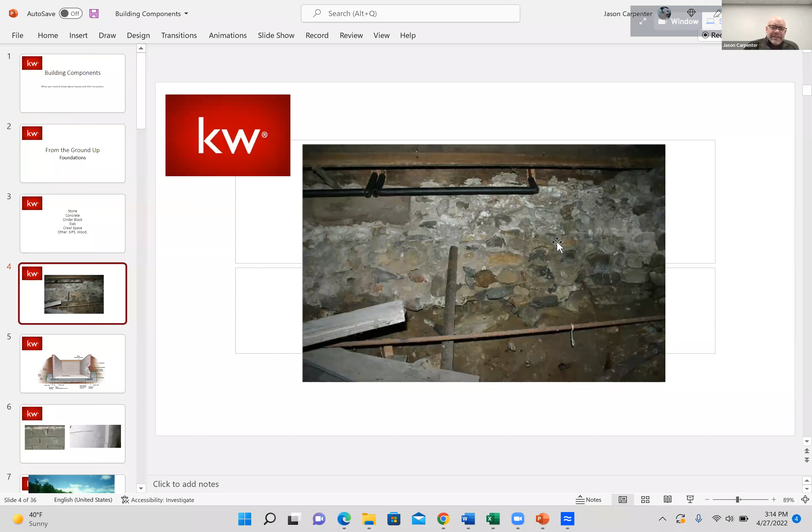This over time is okay, but not great from a structural standpoint. It can settle. One of the things you'll look for on a lot of these stone foundations is that mortar in there through the years has gathered enough moisture, released enough moisture, and it's just sandy to the touch, and that sand will just fall right off. That can result in the stones coming loose. So look for piles of sand on the concrete floor, missing mortar, things like that. It can be skim coated, can be fixed, but something to look out for.

Now, concrete block, used a lot on the lakeshore. I don't know if that's because of the sandy soil composition over there, or just the makeup of the builders. You'll see it in Grand Rapids as well, and throughout West Michigan. The things you want to look out for with a concrete block foundation is what we call buckling, or a backfill problem when they push dirt back in around the foundation. Poured concrete can have this too, but along this lateral line you'll see kind of a buckle.

This pushes in if it's improperly filled, and you'll see a gap here. You'll also get what's called step cracking, where you get a little bit of settling, and you'll see like a jagged line right along the mortar, just a crack down along the steps of the mortar joints. That could have happened 10 minutes after they backfilled, or 10 years, or 100 years. It's not for us to say. Everything can be fixed—just matters how many dollars and zeros are on the check, as I always say.

But if that wall isn't straight vertically, or you start seeing that step cracking, and if those concrete walls are painted, look for extra caulk that's been painted over in those mortar joints. You can kind of see it gobbed on there, or if it's unpainted, a different color of mortar. You'll see some repairs there, and just make sure you're not seeing any staining.

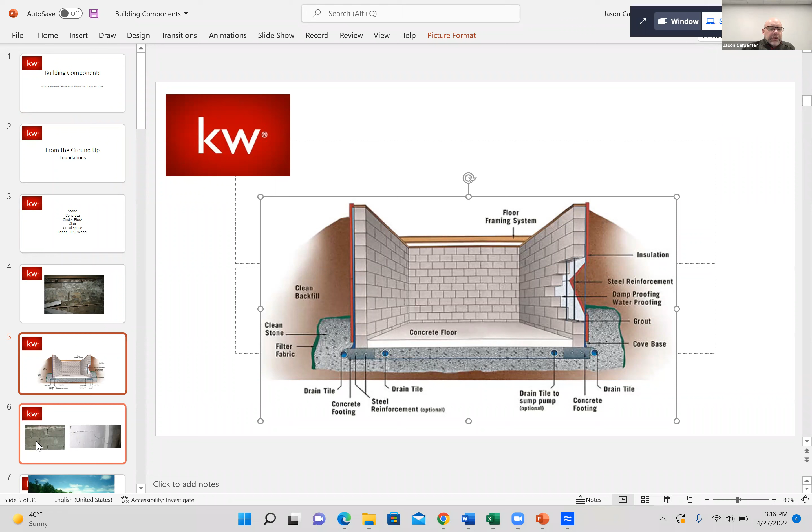Now, here is a modern foundation. This has your poured walls. You can see there's a membrane, or this is probably a spray-on tar material that waterproofs it from the outside. Most new construction nowadays has perimeter drains at least on one side, either on the interior or exterior of the home, to allow water to flow away. So obviously, as time goes on, we've learned things.

The thing you want to look for in poured concrete is jagged cracks. You can see along this, you'd see a crack starting up here and going down to this corner, and one of equal size and depth coming from this corner down to this window. That could indicate maybe that corner has settled a little bit.

Again, it's not our job to play structural engineer. It's our job to visually see things, point things out, and make sure the buyer is aware of what we're seeing. If you know specifically, like it's your listing, that water comes pouring in as soon as you get a half inch of rain, that should be disclosed whether the seller did or not. If it's something you've observed—maybe you were there last week during a rainstorm showing the house and saw water pouring in, and now you're showing it to a different buyer this week—it probably should be disclosed. Hey, I was in here last week, saw water pouring in. That's your job.

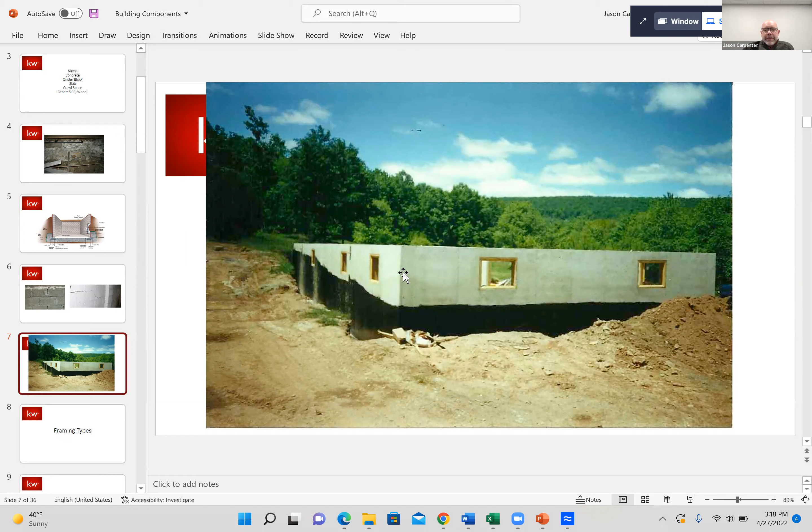So on top of framing types, wood is now at a premium, and there are energy codes that need to be met. You have different types of framing, and now modular and manufactured homes versus stick built, 2x4 versus 2x6 framing. There's always going to be some changes there. You do have engineered wood framing now too. We were at a commercial conference last week, and they talked about mass timber, where they're making building panels out of laminated timber that has the strength of concrete and steel. You'll see that in some commercial buildings.

With a modular home, and again, the MLS, fellow agents out there, you have to understand the difference between modular, manufactured, and site-built homes. And then there's also a kind of hybrid version called panelized construction.

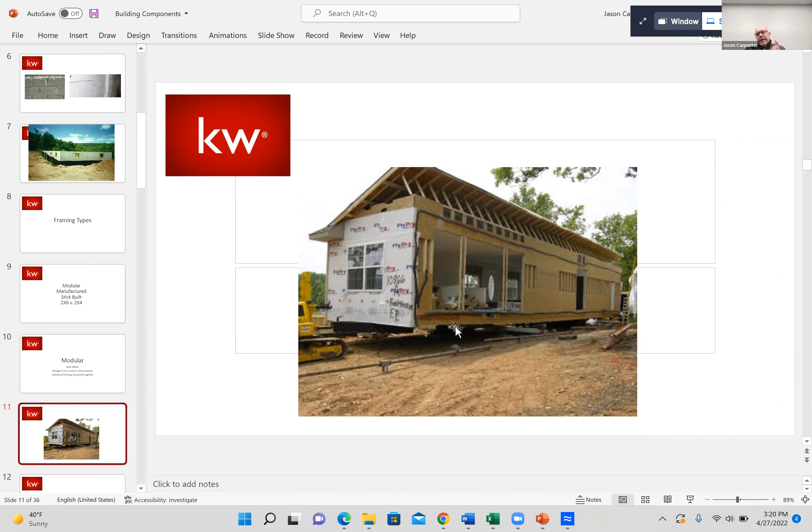A modular home is built off-site. It's brought in on a truck in several pieces. It has some traditional framing methods, but it's then joined together. You might see three or four pieces of half the home brought together and then joined. So when you go in the basement of one of these homes, you're going to see a joining plate. You'll see two beams down the center of the house and a joining plate there, versus one main beam running down the center. That's a good indication it's modular.

A mobile home is brought in one piece of framework, maybe two, since sometimes double wides would qualify, but typically it comes in with a metal framework underneath it like a car does. It's titled like a car, there's a plate on it, and it has a VIN number like a car. And I have this term on here: highly unfinanceable. So it's a little tricky, but it can be done.

The one thing most lenders require is that it's the only site the mobile has been on, simply because you get shifting and heaving if you take it off one site and move it to another. I think that's why they do that. So there's a thing called an affidavit of affixture that should be available during the financing process to prove it's there as the only site it's been on. If you don't have that, you have to hire a structural engineer to go out and verify it's in good enough shape to be financed.

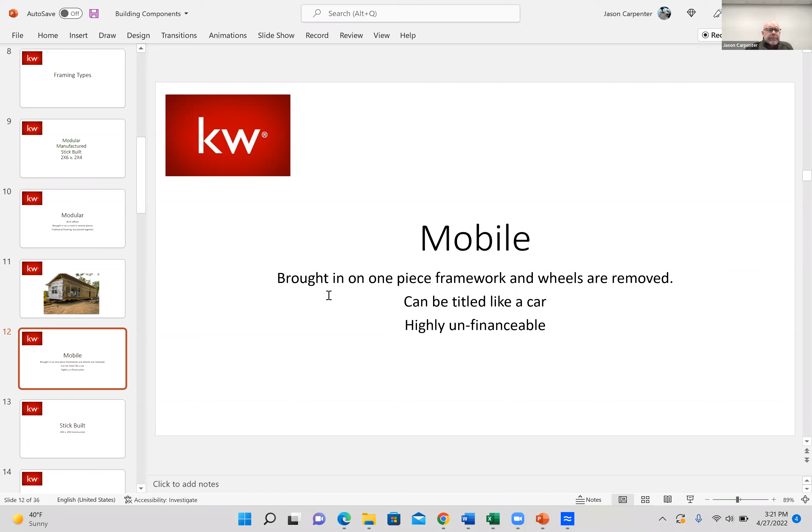More on mobiles, and real quick, you realize too that you can't list and sell a mobile home in a mobile home park, because that's not attached to the land. The landowner owns the land underneath it, and the mobile homeowner pays rent to that, almost like a lot fee. So that's a separate license. There are a couple people in town that do that.

So with stick built, we have 2x4 versus 2x6 construction. One thing to look for, and I usually have a tape measure in my car, I don't carry it into the house with me, but if you look at the depth of the window framing, walking through the living room or dining room of a house, I can usually tell. The depth of a 2x4 is 3.5 inches, and then you've got sheathing and siding on one side and drywall on the other. That adds up to about 6 inches.

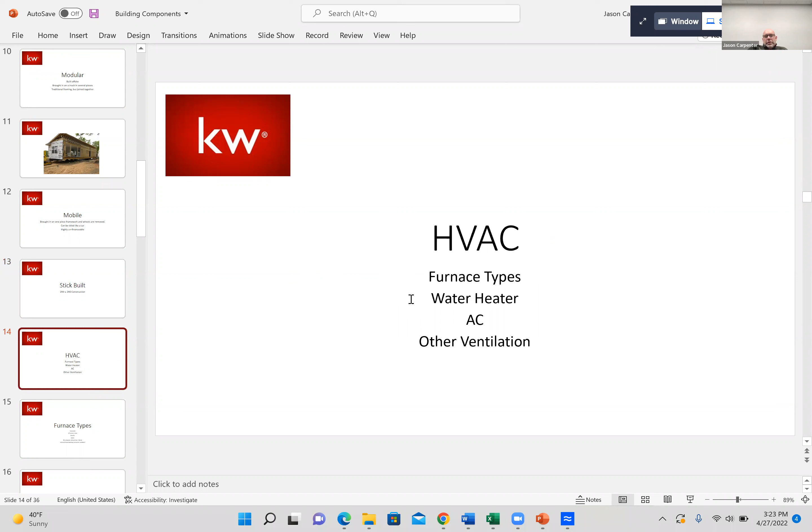So with HVAC systems, you have different furnace types, water heaters, AC, and other ventilation systems that make up your HVAC system. Obviously, the age of the furnace is a big thing, along with the different types of furnaces. We should all know what a gas forced air furnace is, that's typically about a 3.5 to 4 foot tall metal box in the basement. It has a different energy efficiency level, but would have the AC unit in with it, with a coil going in. There are little things you can look for there.

Versus a gravity feed furnace, which comes in an older house, or a boiler, things to look for as far as oil fired versus propane, versus natural gas and or wood.

So with a forced air furnace, you have two different efficiency levels. The high efficiency type has white PVC pipes coming out, usually about 2 or 3 inches, venting outside. Versus the traditional 80% efficiency furnace, which has a metal stove pipe coming out that's tied into the chimney somewhere. That's something you can point out to your buyers.

You'll learn over time the age of furnaces by their color. There's no chart that says tan is 20 to 30 years old, or light gray versus dark gray, or aqua - there's no color coding - but you'll soon be able to tell that size and shade of color of these furnaces are fairly similar based on the year they're produced. So if I'm seeing a tan furnace in the basement, I'm probably going to guess it's at least 20 years old, because most everything's been light gray or dark gray in the past few years.

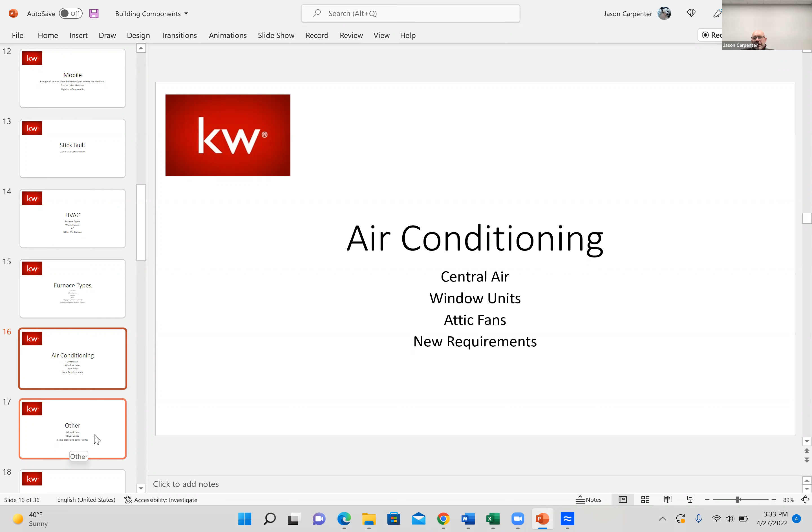So just because they say it's working doesn't mean it won't come with cost down the road for your clients. You can do research—just Google new air conditioning requirements and see the availability of whatever materials they're using. There's technical jargon for that which I don't have memorized right now. Again, we're not trying to make anybody a licensed builder today. Other parts of the HVAC would be exhaust fans—bath fans, hood vents over stoves, and dryer vents.

With high efficiency, you're going to have power venting on water heaters with a PVC pipe versus a stove pipe, same as your furnace appliance.

Not too expensive. The thing about exhaust fans in older homes is they didn't actually vent them outside—a lot of times they just went into the attic. So if you think about dumping all that hot, damp air from the shower into your attic, where it's cellulose insulation, wood decking, hot environment in summer, it's just a mold growth, like a giant petri dish up there. A lot of times you get these inspection reports, and that's what leads to mold in the attic—that venting.

It's really simple to fix. You just pop a hole in the roof, put in a little stove vent, and tie that vent line to it so it pumps that warm, moist air out of the attic. Can be done through the gable end if it's close enough—sometimes you'll get gable venting, just tuck it up there, just something to get that air out of there.

Dryer vents—again, I'm not going to kill a deal on this, especially in this type of market, but inspectors are going to tell you that it should be either a rigid stove pipe coming out of the dryer or a metal flex vent. You see a lot of this white PVC dryer vent hose, and you're really not supposed to use that.

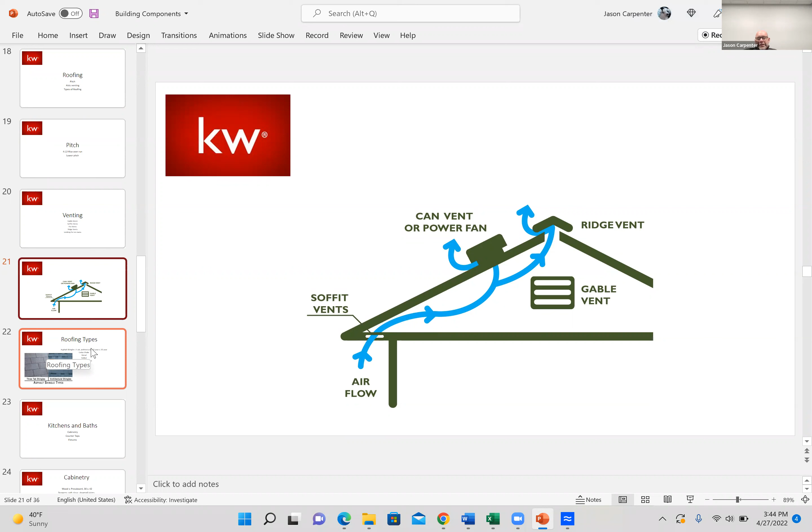Kind of goes back to one of my sayings. I've been saying this my whole career: not everybody should be allowed inside Home Depot. They get some good ideas or think they know what they're doing and it can go wrong in a hurry, ending up costing you more money.

As far as roofing type goes, asphalt shingles are still pretty much the most popular. These old 3-tab shingles, I don't even think you can buy these anymore, maybe as replacements, but they're not putting them on as roofs anymore. You get these architectural grade shingles. There's 25-year and 35-year shingles, and you can get a 50-year shingle now. There's some that are more earth friendly, some that are more durable.

Again, you're not meant to be a shingle expert, but just know that these old 3-tab shingles are going to look thin. They might be rolled and curled on the edges. Something to look out for there.

Cedar shake is actually, I like cedar shake. It's expensive to replace, but it does last a long time. There's clay tile roof, very few of those in West Michigan. That's more of a Southwest sort of thing, but you will see some clay tile from time to time.

Metal roofing is really starting to take off. It's amazing, some of these areas, I think there's salesmen in pockets that go out and sell everybody in the same area. For some reason that happens a lot out in rural areas where you see these metal roofs. They last a long time, at least 50 years minimum. It used to be every once in a while you'd see a metal roof on an old farmhouse, but now you're seeing quite a few more of them on regular housing.

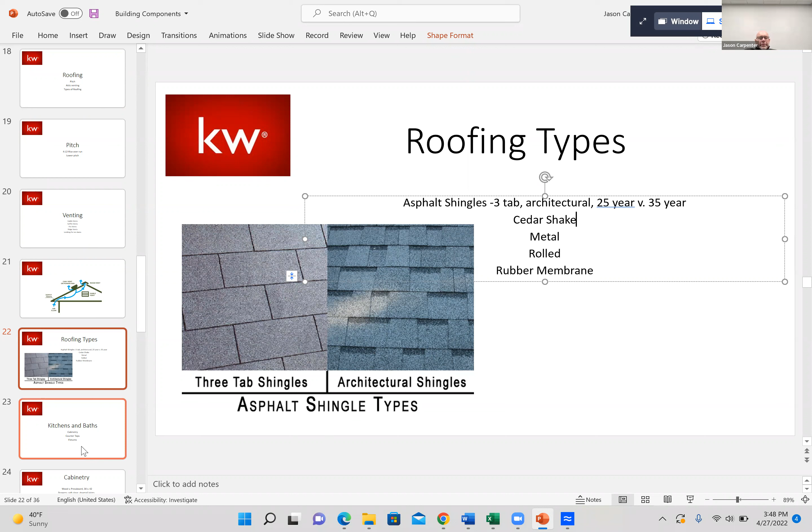Solar shingles, I think Tesla's come out with solar shingles that produce solar energy and can get you a little return on investment there. Not super popular yet due to cost, but just know the types of shingles and what to look for. Again, it's not our job to tell somebody how old the roof is, but if you see an old 3-tab shingle that looks thin as paper with the edges curling up, you can probably say that an inspector should look at that.

So kitchens and bathrooms - I'm not going to spend a lot of time on this, but as far as different types of cabinetry, countertops and fixtures, whenever I walk somebody through a house, we always end up opening the drawers of a kitchen cabinet and looking at it.

One thing I always point out is if you see this on the side where it's solid wood and what they call a dovetail joint, that's a solid wood box with good soft close and good rolling drawers, versus if you see particle board with just a cabinet front stapled on, it's probably not as high of a quality cabinet, and it's probably just going to have a metal runner that rolls a little noisier. So try it before you buy it.

At least open a cabinet or two and see if it's got soft close drawers and doors, adjustable hinges - make sure they move. Obviously you get into a house built in the 50s, they're all site-built with plywood, so you've got these cabinets that basically screech if they're not waxed, and sometimes they're a little tough to move. At that point you're probably wondering whether or not it's worth it to replace them all.

But it's amazing to me that all the stuff they used to do right on site at a house without much in the way of power tools either.

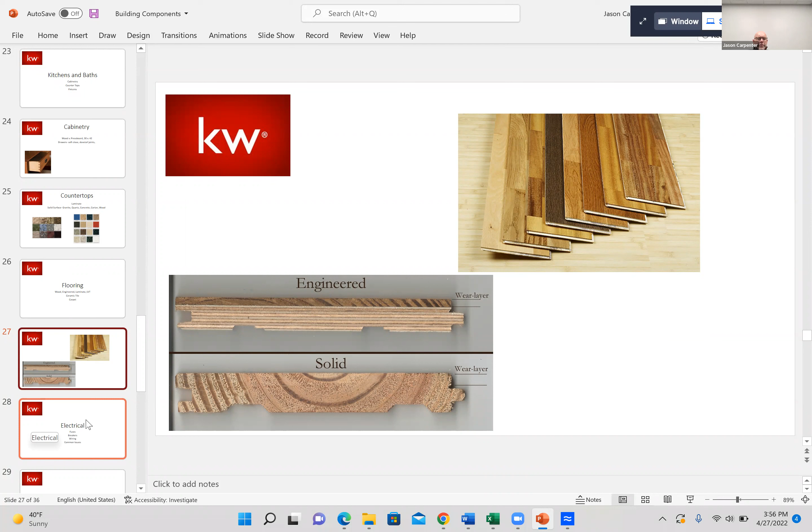So this is a pretty good example of a cross section of an engineered wood floor here. It looks like plywood. This, you can actually see the tree rings here still in the solid wood floor. And you can see here the difference, like you get a little bit of a wear layer here, this is much greater. So when they talk about that wear layer, that means you can sand that down a couple times and still refinish that. And then there's some examples - these are all laminate examples up here. I'm not sure I had really good ones, this is probably old enough that there wasn't quite the selection of pictures for luxury vinyl stuff.

Moving on to electrical systems. So the old method was to have knob and tube wiring, maybe with fuses if you're lucky. And that's evolved into having copper wiring with different sizes and gauges of wiring going to different rooms, breaker panels versus fuses. We're not here to make you electricians, but if you walk into a house and you see a fuse box like this, where you have the little glass fuses that you screw in there, it's still safe, it still works, but not as safe as breaker panels.

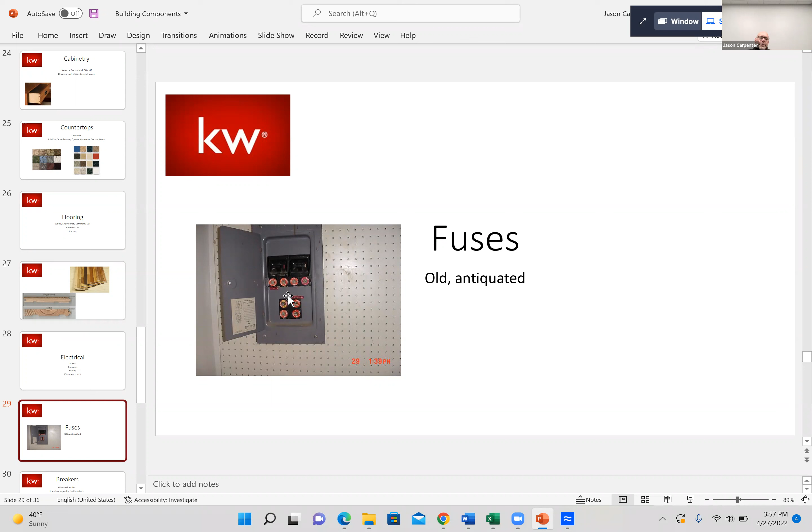I'll be pointing this out to my buyers. Say, hey, look, this has a fuse box. These 4 fuses control the system of the house, as opposed to a breaker box that has 20 or 30 breakers in it.

Now, the breaker panel should have a main shutoff. If it doesn't, that's something that can come back on an inspection, but nobody's going to shut the house down or refuse to let you move in if it doesn't have one. It's always a good idea to have a main shutoff, and then your other breakers here.

One thing to keep an eye out for, homes built in the 60s and 70s. We're not making you electricians here, but this is what I've learned over the years. If you see this Stab-Lok breaker panel, or these orange fuses or breaker switches with numbers on the end of them, or the words Federal Pacific anywhere, that's a company that if they were still in business today, this product would have been recalled for safety issues a long time ago. The problem is they don't trip under a heavy load, which means they just don't work, and that's a fire hazard.

I haven't seen a ton of these lately. The farther we get away from the decades they used these, the more likely they're going to be gone - kind of like lead paint, but you still see a few out there. Homes built in the late 50s, early 60s, maybe early 70s may still have some. In this seller's market, it's very unlikely you're going to ask the seller to replace this, but you could tell your buyers to budget at least $1,500 after buying the house to replace it. It would come back on an inspection report too, or it should.

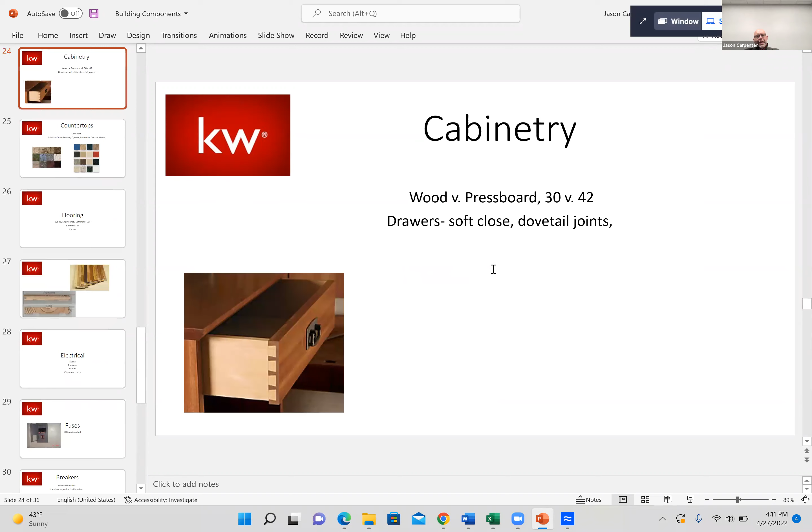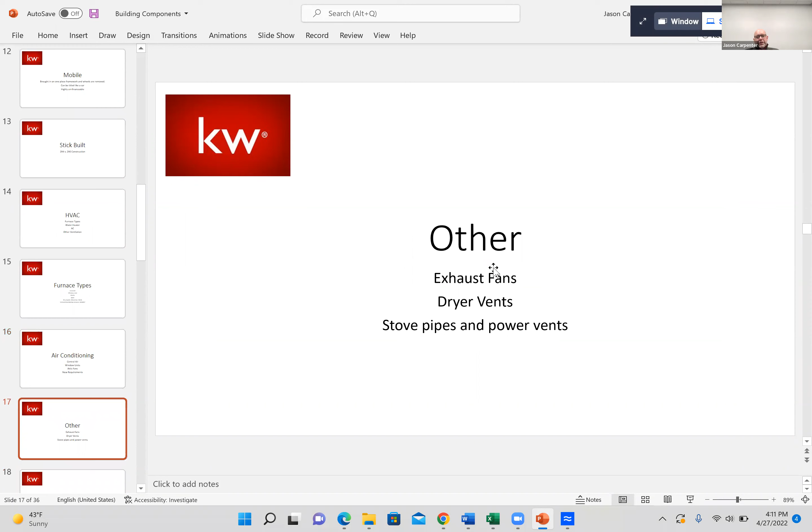So that's kind of an intro to housing components. We kind of ran through stuff fast, so just a recap: you've got the foundation, different types of foundations, different framing types, different build types. Then you have the components of the house, the HVAC, the furnace, the air conditioning, the roofing. And one thing I don't have in here, and I don't know why, I thought my finished product did have it, and I've got some blank slides in here, I'm going to have to touch this up.

We didn't talk about was plumbing. So you have different types of plumbing too. You go into these older houses, pre-1960, maybe 1950, and you had galvanized steel as your supply lines.

Those old galvanized pipes are easily corroded. Then they went to copper, and now you have the new PEX material, PVC—lighter, cheaper, plastic-based stuff that's easier to work with. I've plumbed a house with both copper and PVC, replacing galvanized before. The new PEX stuff is unbelievably easy to work with compared to having to sweat old copper lines. So you couldn't pay me enough to work on galvanized.

If I see galvanized plumbing, I just call a plumber—it's not even anything I want to do. So again, things to point out: if you're in a house, turn on the kitchen sink and see what the water pressure is. Those old galvanized lines corrode easier on the inside, and sometimes the water flow gets that scale built up in there. It's okay to look under a kitchen sink and see what kind of plumbing is coming out of there.

If you see do-it-yourselfer projects from a plumbing perspective—unlike electrical, plumbing is probably not going to kill you if you do it wrong, whereas electrical can. Your basement might flood, you might be set back a few thousand dollars, but nobody's going to drown unless somebody's sleeping in the basement and the whole thing floods or something. So it's still expensive if it's done wrong.